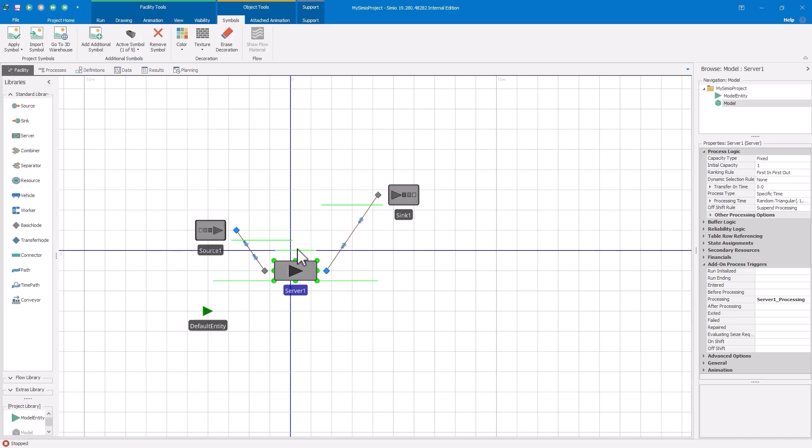So I'm going to place it there, and I'm going to use a color so that it will stand out. I'm going to initially run our model in trace so that we'll see that step executing, and then we will see that in orange. So I'm going to go back to my model. So now we've added that, and now when our entity arrives and is processed, we should see that scripted step execute.

So I'm going to turn on model trace so that we can see that. Expand this window just a little bit, and now I'm going to run. And now there you can see the orange going by, so our model's finished. So let me just scroll back to the top, and you can see there's our first execution of our scripted step, and then our second one should be here, right there, and then our third one is right there.

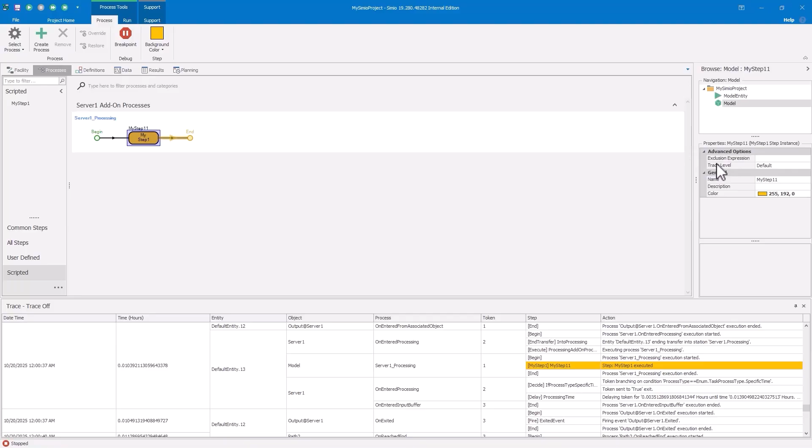And so before we go on, I'm just going to do one other thing to simplify the debugging and observing how these scripted steps execute. So I'm going to turn trace off, but I'm going to leave the trace window open. I'm going to go back into my process and select my scripted step instance and go to the advanced options under this trace level option. And I'm going to set that to always.

And so what that does is it says, I always want to trace this step, even if the trace is off. And so now when we run our model, we don't see the trace except for that single step where we set that trace level to always. So back to our scripted step. And note, when we ran the model, we didn't make any changes to our Python code. So we just executed the code that was copied in as part of the base template. So let's have a closer look at that.

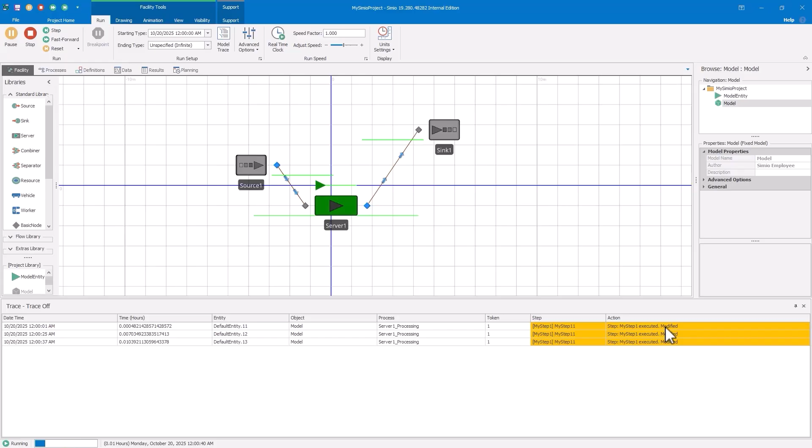And then there's one line that gets executed, and that ejects the information to trace. So it's just context, the IStepExecutionContext, .ExecutionInformation, .TraceInformation, and then the string that you want to have printed to trace. So, for example, if I go back in and modify this, let's say executed and just say modified, and then I save the script file, and then go back and execute, and now you can see that we're showing that new line in trace.

And so creating and using scripted steps is basically adding the step and then editing the Python code to implement the logic that you want. Of course, the most important part of doing this is passing information back and forth between the Simio model and the scripted step, so that in the Python code I have access to states and properties and objects in the model, so that I can implement the logic that I want to have in my step. So we're going to see that next in another example.

And we're going to start out with looking at just one of these, something called server selection model. So the server selection model, the SPFX file that I'm going to show, is available from the GitHub repository that I showed. The goal here is that when an entity arrives at the source, we're going to select the server with the shorter queue. And we're going to default to a preferred server if the queue lengths are equal.

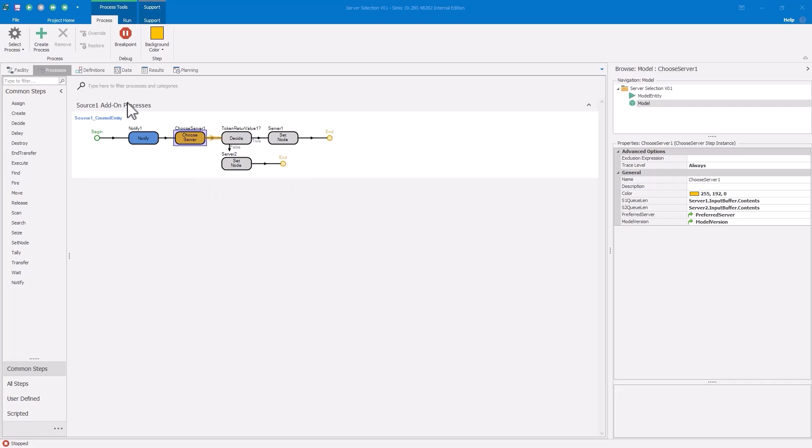So let's have a look at the Python code for our choose server scripted step. So remember, we go to definitions, scripted step section, and hit the edit button. That will bring up our editor. And now here is the choose server Python code. So it's a little bit more code because we have to read the information in and then make our decision.

And so you can see I've commented the code here. I tried to comment it enough that we can see what's going on. So the first thing that we read is the model version. Again, I mentioned here that we don't use it in the logic, but we might in the future. So to get the model version value, that's where our property reader comes into play.

So we have our property reader as one of our parameters. And so we use the get property method and specify that model version name. And so if you go back to our Simio here, we see model version is the property name. And so we're using that property name in the property reader. And then it's a string value, so we just use the get string value, and that's our model version.

We do the same thing for preferred server, except it's an integer value. The values are stored as double values, so they're either strings or double values. And so we read the double value and then cast that as an integer. And then we print to trace the model version and the preferred server. And so if we go into the model and run that, you can see that print.

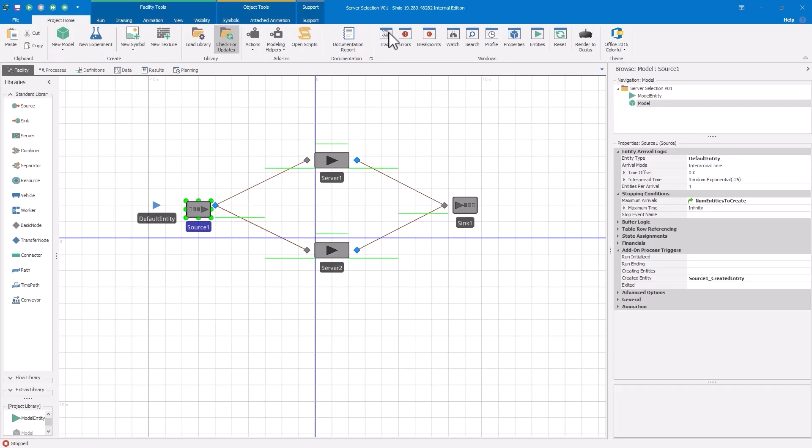So let me just go and turn trace on. I'm going to just open the trace window, actually. You can see the remnants from last time, and I will just set this to one entity, so we just see it one time. So set our max number to create as 1, execute our model. Our one entity has come and gone, so the model stops. And you can see 2 entries in our trace. We have our notify, and then we have our choose server.

The choose server, this is the line that we just looked at, so it prints model version 1A, which was read from this property, and the preferred server was 1. So if I go in and say, let's change the preferred server to 2, and then execute, we can see now the preferred server is 2.

So next in our code, we are going to read our 2 queue lengths. These are also integer values, so we read them using the property reader, get double value, and then cast as integer. And then we are keeping track of the entering value of our context return value. So context.return value is the token return value for the executing token. And we are reading the 2 queue lengths and implementing our shorter logic.

So if queue length 1 is equal to queue length 2, set it to the preferred server. Otherwise, if queue length 1 is less than queue length 2, set the return value to 1, so server 1. Otherwise, set the return value to 2. So choose the preferred server if they're equal. If 1 is less, 1, otherwise set it to 2. And then, of course, we trace that information back so that we see that in the trace, which we saw before.

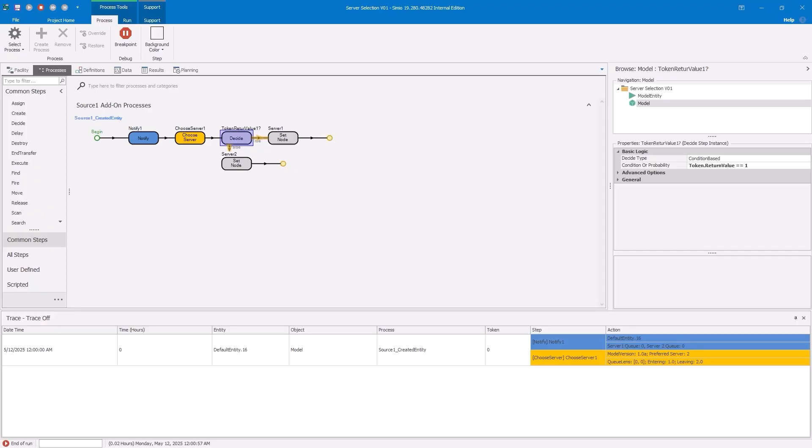So we go back to our Python code, and you can see that we have set this context return value to either 1 or 2 based on the length and the preferred value, and we're just printing that out right here. And so in our Simio process, once we execute, we then can decide on that token return value. It's either going to be 1 or 2, and it will have been set in the Python code. And so the last part is to set the picture symbol.

So let me go back to the Simio model. Let me stop this model, and our default entity has 3 symbols, 0, 1, and 2. So we want to select picture 1 if it goes to server 1, picture 2 if it goes to server 2, and that's where we're getting the red or the blue. And that happens right here in the code where I'm using the context associated object.

And so recall the context is the step execution context, and it has a property called associated object, which is the associated object of the token that's executing the step. And then I say of that associated object, I want the picture state. So that's what picture is, and then I can just update its value.

And so note here that I have used the associated object for the context and then said, I want the picture state. And then by setting that value in the Python code, the value is in turn set in the Simio model. And so that's why the entities that go to server 2 are blue, and those that go to server 1 are red.

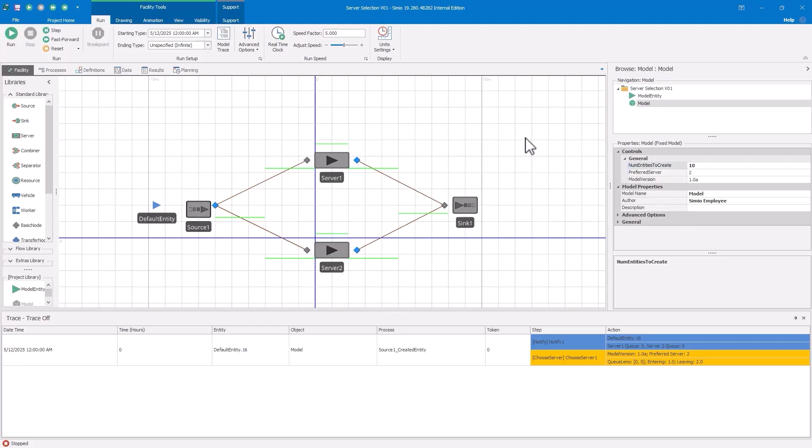So hopefully at a high level, at least at a conceptual level, this makes sense, that we are passing information that we need to make the decision in the Python code, the server lengths and the preferred server. We're then making that decision using Python logic, and then we're implementing our selection by setting state values.

What might not make so much sense is how we decide the exact syntax. So for example, when we go in our Python code, the property readers get property and then get string value, get double value, how we know that context.return value corresponds to the token.return value state. And then the simplest part about printing to trace here, that context.executioninformation.trace information is what we need. Well, that is the implementation from the Simio API.

And so if I go back to my Simio model and go to definitions, scripted step, you see that we have a button for the Simio API reference guide. And so if we open that, we can look at the details of that reference guide. So for example, if I search for the IStepExecutionContext, which is what context is, I can then see the interface to that. So here is our execution context.

Here's the return value. So here's where it says gets and sets the return value of the executing token. Here's the associated object that gets the associated object of the executing token. And because of where this step is, that associated object is in fact the entity. And then we can go look further at that associated object and say, okay, this is of type IElementData. So I go to IElementData, and then here's the state collection, and so on.

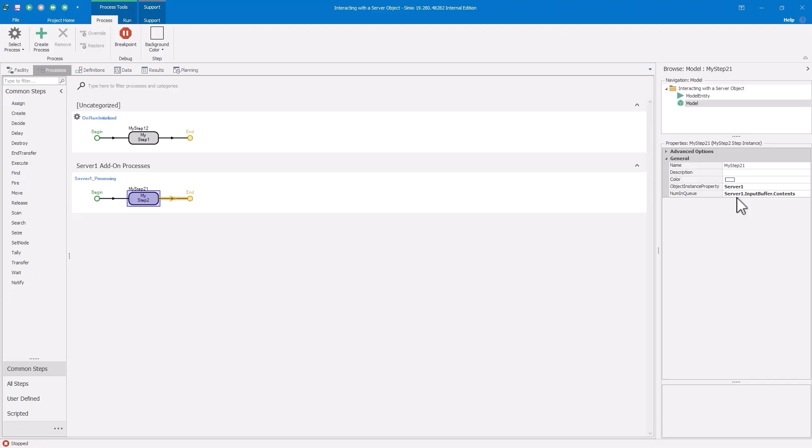And so if we go look at the implementation, the step instances, in my step 1, we simply pass Server1, and in my step 2, we pass Server1 plus that expression for the queue length, which is Server1.InputBuffer.Contents. And so we go look at the Python code. So go to scripted steps and edit, and we can see our two files here, mystep1.py and mystep2.py.

And notice in the code, I use the lprint function that I mentioned before. So I have lprint that just prepends my string with script print, and I use that more often than I do the trace because I find it more convenient to use that log file to do debugging and see what's happening in my script where I want to versus writing to the trace file, but both will work.

And so what you see in my step 1, which gets executed in OnRunInitialized, is we're just seeing what's happening inside our server. So we read the property, which is object instance property, and then we just print some information about that. So we print the property string. So we print it as a string value, and then we print it as a double value.

And then we know that this is an object reference, so we then cast that property as an intelligent object property. And so we then tell Simio, through the API, I want to get the intelligent object reference. And so now objref is the object reference. And from that object reference, I can get the initial capacity, which is a property. So I use get property initial capacity.

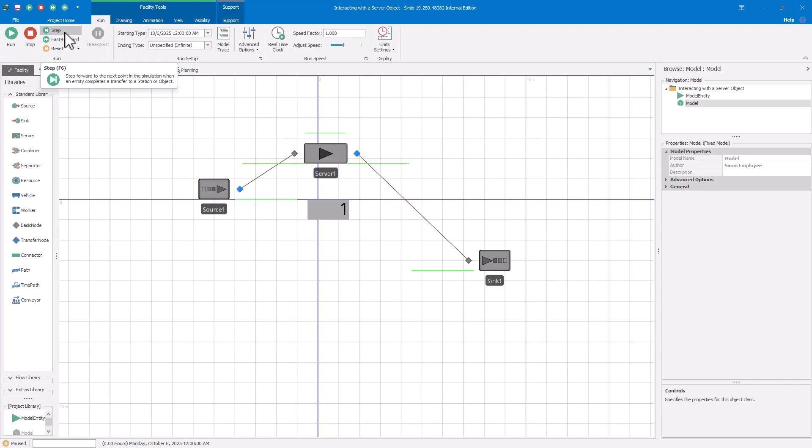So if I go back to my model, one more thing is here's the script. I'll show this. Here's the script that I use to monitor that log file. And so now it is monitoring that log file for script print lines, as we say here. So if I go back to my Simio, I'm just going to click on step. And so when I execute the step, it then executed OnRunInitialized. So if I go back here, you can see the output from my lprint statements.

So I'm executing mystep1. Here's where I print out the property value, the actual property string value and property double value. Here's where I get the object name, the initial capacity property, and the initial current capacity state.

Going back to my Simio model, I will stop it so that we can then go look at the second scripted step. So again, my step 2, I pass the object property and the expression property. And so if I look at that code, you can see what's happening. Oops, pull that up here. There we go. In my step 2.

And so we use the same lprint function that I had before, and we get the object reference just as we did before. I'm now reading the number in queue, so that's our second property that we pass in. And so now I have a reference to the server object, and I have an integer for the number in queue. And so now I want to read the state, the current capacity for the object.

So I just use object reference states current capacity. So the states is a collection of states for the object. And then I extract the current capacity. And then I cast that as a real state. Then I can ask, what is the number in queue? Is it greater than 2? Then I want to increase the capacity. So here I'm getting a state value, and here I'm setting the new state value.

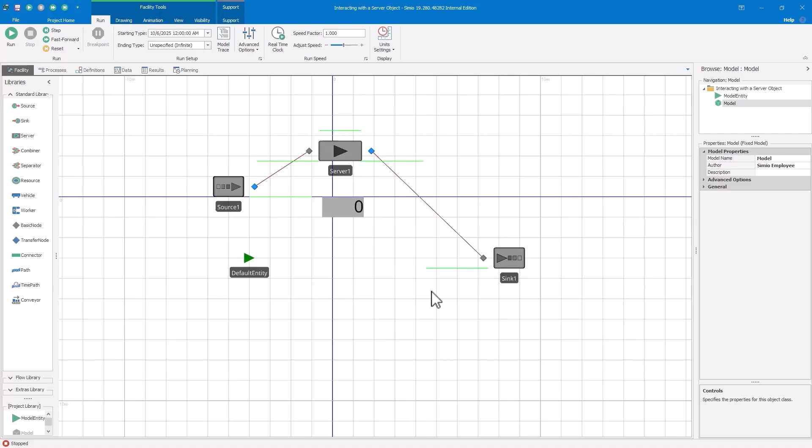I find that a little easier than using trace, but note that we could have just as easily in the code. So let me pull back up the code here, the Python code. Instead of using lprint to print the context information, we could have just as easily printed it to trace. So if you find that easier to print to trace and to use the trace to get information from the running model, that functionality is there for you also.

So the last thing we want to talk about in this model is interactive debugging using VS Code. Back to our model, and I'm going to open the scripted step page under definitions, and note that we have this enable debugging button. The debugging functionality uses debugpy, a standard debugging package, and so theoretically any IDE that supports debugpy type debugging should work with the Simio scripted steps.

We've tested it extensively with VS Code, and so my recommendation is if you don't already have a favorite IDE, then you might as well use VS Code, since that's the IDE that we've done the most testing with. So to do interactive debugging, what I need to do is I need to enable debugging in my model, and then I'm going to go in my Python code here, and I'm going to set a couple of breakpoints.

So I'm going to go in the step 1, which is run initialize, and I'll just put a breakpoint right here. And then I'm going to go in my step 2, and I will put a breakpoint. Let's put a breakpoint right here where we get the object reference. So we have the 2 breakpoints set. And so now I have enable debugging set.

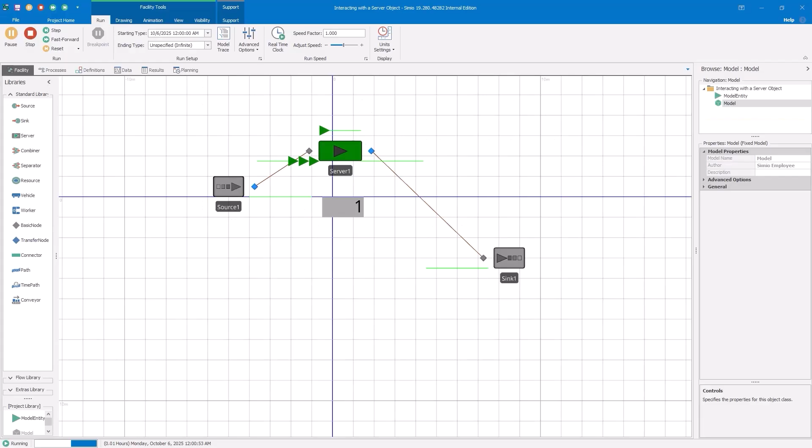Note that the debugging setting is sticky, so if I go back to definition scripted step, we see that enable debugging is still highlighted. So if I run the model now, it's still going to go through that debugging step. So I could go back into VS Code, start the debugger, and so on. Or if I don't want to debug, I can just start the model, then stop the model, and it will run and stop. And then I can go back in and uncheck the debugging, and now the debugger is disconnected.

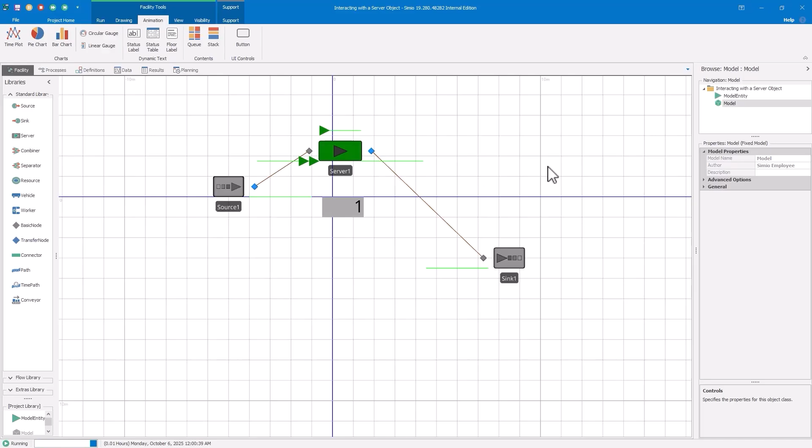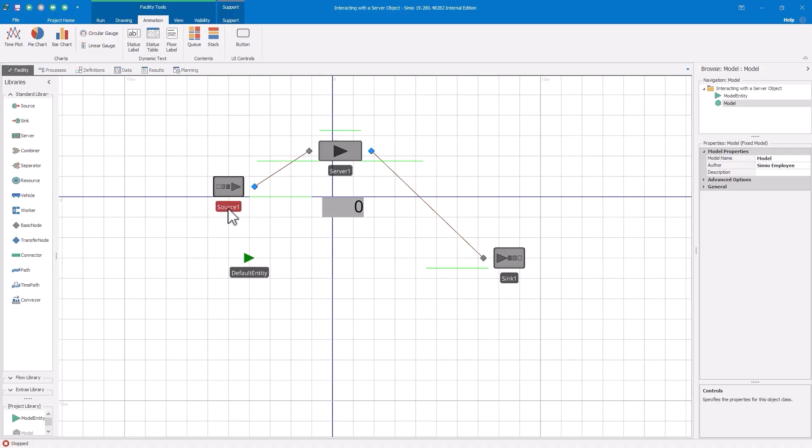So using the interactive debugger is a very powerful tool to debug your Python code and to try to get an understanding of how the data structures are set up, so that in conjunction with the API reference guide and the capability to either print to trace or print to the Simio actions log, that's the set of tools that you'll use to debug your Python steps.

The last example model that we will look at in the Solution Series presentation is also from the GitHub repository, and it's using model global data. And in this model, we're going to do 3 things that we haven't seen before. First of all, we'll use an external Python package. In this case, we will use pandas. Secondly, we will show how we read a data table in a Python step, and create a pandas data frame that mimics that data table. And then finally, we will show how we use model global data to store and retrieve data structures between Python scripts and between Python script executions.

So what we're going to do is read a data table and create the pandas data frame. We'll store the pandas data frame as something called model global data so that we can easily retrieve the data frame so that we don't have to reconstruct it every time we want to access it. So this is a very powerful function that I think you'll use quite often as your Python scripted steps get more and more complex, because we want to be able to build data structures that support data processing and data analysis and so on, and then use those data structures as the model executes.

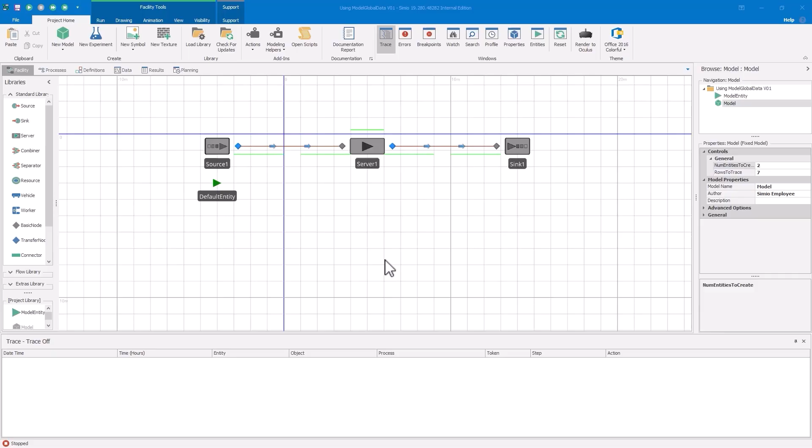Here is our model, again, using model global data v01. This came directly from the Simio GitHub site. And it's a very simple model where we have a source, a server, and a sink. If we look at the source, we create a number of entities specified by a reference property. Here I have it set to a value of 2. So we're going to create 2 entities. They're going to go to the server and then the sink. And if we look at the server, our server has a processing add-on process.

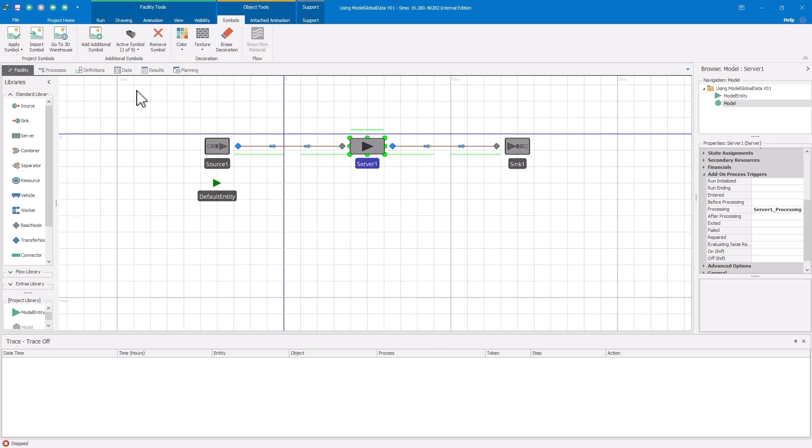If we look at our scripted steps, we have 2. We have something called model global data. And for that scripted step, we have two properties. The first is a table property, where we specify the table that we want to use. And the second is rows to trace, which specifies how many rows of the table I want to print to the trace while I'm doing the build process. And then we have retrieve data frame in global model data, and it doesn't have any properties at all. And so we look at our processes and we see that we execute model global data in OnRunInitialized.

So when we start the model, we're going to execute this step. And then when an entity is processed, we first notify, and then we execute retrieve data frame in global model data. So if we look at our data tab, we see we have a data table named items. And the items table is the one that we're going to read. We have two other tables that we don't use in this model.

And so if we look at our processes, when I look at model global data, I pass the items table as the property items table, and then I use the reference property rows to trace. And so before we look at the Python code, we'll just run the model and you will see that I'm printing to trace.

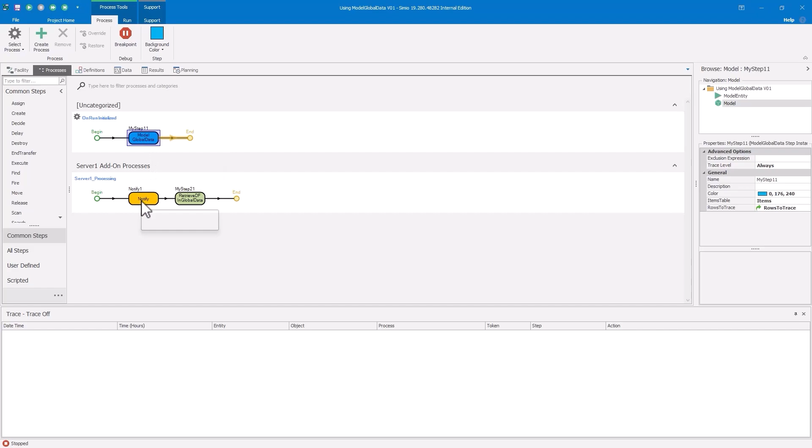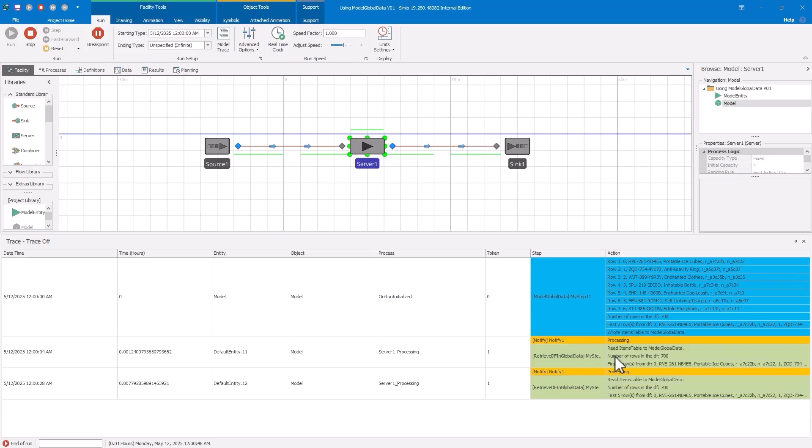So we have model global data in blue, we have notify in orange, and then we have retrieve data frame in green. And so when I run, you can see in our trace, we have our blue code, which is the on-run initialize. So we're creating the data structure. Then we're processing two times. We have two entities. So the orange is the notify step, and the green is the Python scripted step code.

So now that we've seen the model run, let's have a look at the Python code for our two scripted steps. Just going to reduce that trace window a little bit, stop the model, go to definitions, scripted step, and hit the edit button to open our text editor. And we see our two files, one for model global data, which is the scripted step that's called in on-run initialize, and then retrieve df in global model data, which is called as the add-on process for the server.

So let's start with the model global data, which is where the lion's share of the work in this model is done. So you can see in the code that we define two helper functions. One is called get df from table, and the other one is called show first rows of df. So I'll talk about those in just a second, but let's talk about the basic execution sequence.

So when this step is executed, we read the rows to trace, and this is telling us, as I read the table, I want to add to trace some number of rows of that table just to see what's happening during the read process. So we're reading that in as a property on the step. Then I'm making a call to our helper function, get df from table. And what I'm sending it is a list of the property columns. So we have item number, item name, rack, and node.

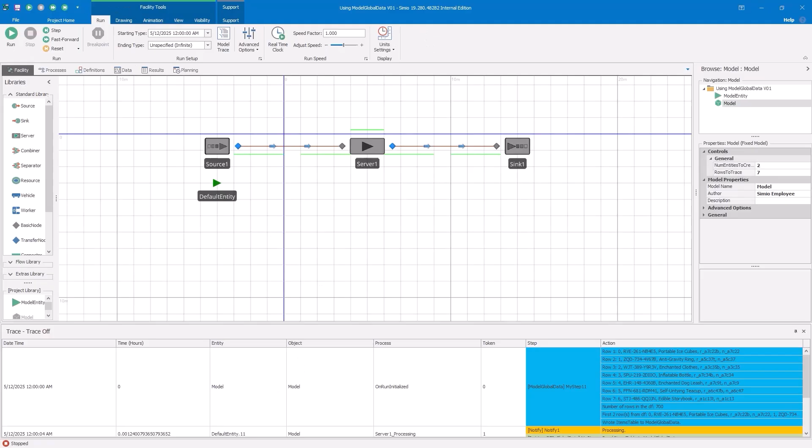I jump over to the model. We see that those are the property columns of our table. Go back to our Python code. We have an empty list, and the empty list is our list of state columns. So this table doesn't have any state columns, it only has property columns. Then we pass the scripted step property name, the context, the property readers, and then finally the number of rows to trace.

So we pass all of that information to our function, and it returns to us a pandas data frame. So if I take a quick glance at that function, you can see what's happening. I'm using the name of the scripted step property to retrieve the property and cast it as a table row reference. Once I have the table row reference, I can then get the table row count, and then I can iterate through the rows of the table, constructing our pandas data frame. And so that's what happens in this last step, where I create the data frame using the row data, and then I return the data frame to the calling function right here.

And so we end up with df items as the pandas data frame of interest. And so I then print to trace the number of rows in the data frame. So this is our data frame length. And then I call our second helper function, which is show first rows of data frame. So I give it the data frame that I just constructed, the context, and then the number of rows to show, and it just concatenates those together and shows those.

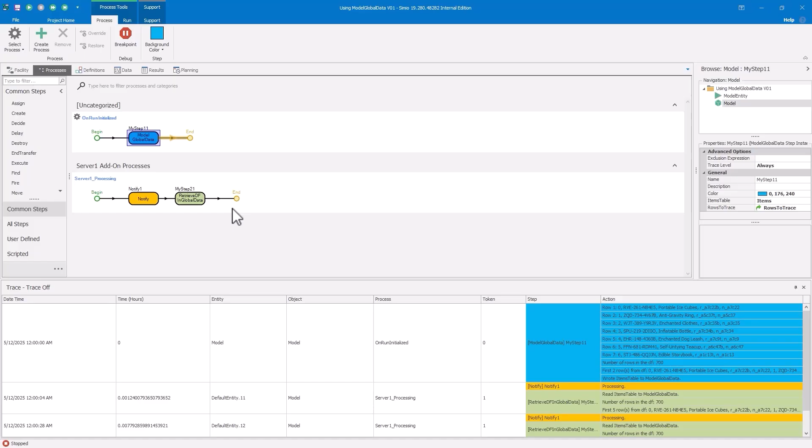In this model, we don't really do anything. We just construct the data frame, and then we just demonstrate that we have retrieved it by printing some rows. But in more complicated models, I would be using that data structure that I retrieve for doing decision making or implementing other process logic. The last thing that I'll show in this model is how we tell Simio that we want to use the external package, in this case, pandas.

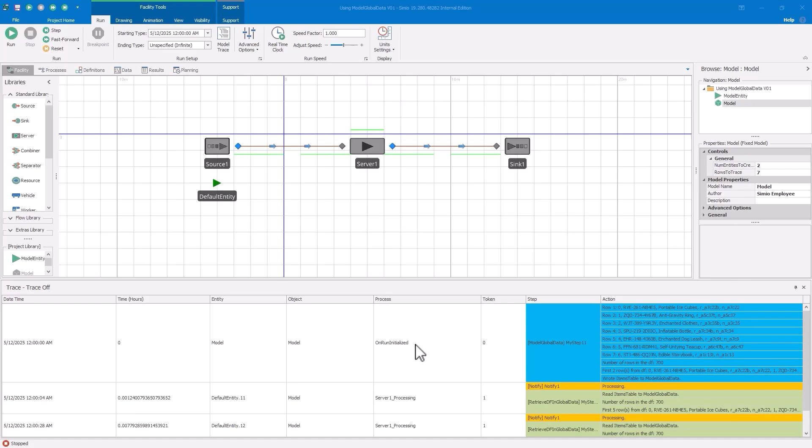So I'm going to go back to our code, so go back to definitions, and then edit the code, bring up our code, and you can see that we have 2 lines here that involve the pandas package. We have the standard Python import statement where we import pandas as pd so that we can use that package in our code. And preceding that, we have #package pandas. And that declaration tells Simio to install the pandas library in the temporary Python library.

So the way Simio executes Python is it creates a temporary Python environment when you open a model or when you add a scripted step to the model for the first time. And when we add the package declaration and then specify the package, that tells Simio that we want to install that external package. And once you do that installation, you're able to do the import as you normally would in Python.

One note: when I add this #package and then the package name like pandas and hit Control-S to save the script, you might have a minor delay while Simio goes out and retrieves that package. It's either going to retrieve it from a cache if you've used that package before, or it's going to go out and retrieve that package just like pip normally does when you're constructing your own Python environment.

So that concludes the presentation of our using model global data example, which is our last example in the presentation. So in summary, let me say that the Python scripted step is a comprehensive feature with a lot of functionality, a lot of features, and so there's a lot to learn in order to use these features. So we have several different resources. The most important resource to get started is our GitHub repository.